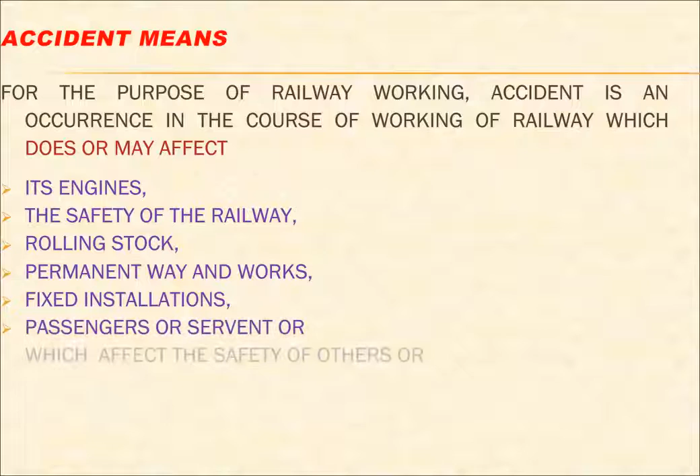Accident means, for the purpose of railway working, an occurrence in the course of working of railway which does or may affect its engines, the safety of the railway, rolling stock, permanent way and works, fixed installations, passengers or servants, or which affects the safety of others, or which does or may cause delay to trains or loss to railways.

For statistical purposes, accidents have been classified in categories A to R, excluding I and O.

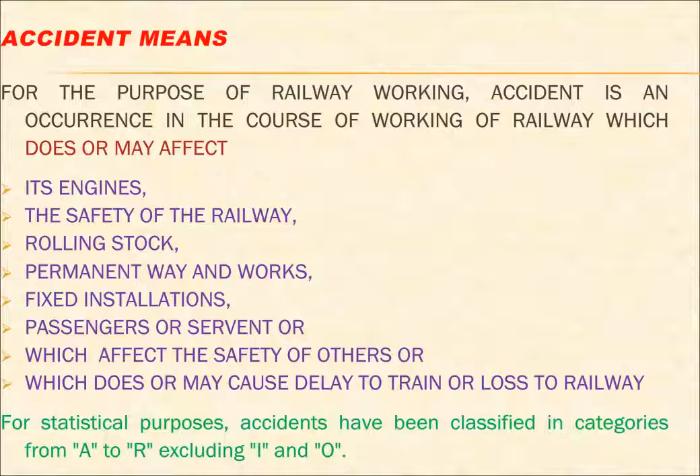Serious accident. Serious accident means an accident to a train carrying passengers which is attended with loss of life or with grievous hurt to a passenger or passengers in the train, or with damage to railway property the value of which exceeds 2 crores, and any other accident which, in the opinion of the Chief Commissioner of Railway Safety or Commissioner of Railway Safety, requires holding of an inquiry by the Commissioner of Railway Safety, shall be deemed to be a serious accident.

Classification of accidents: Number 1, train accidents. Number 2, yard accidents. Number 3, indicative accidents. Number 4, equipment failure. Number 5, unusual incidents.

Train accidents: consequential train accidents and other train accidents. Consequential train accidents include train accidents having serious repercussions in terms of loss of human life, human injury, loss to railway property, or interruption to rail traffic.

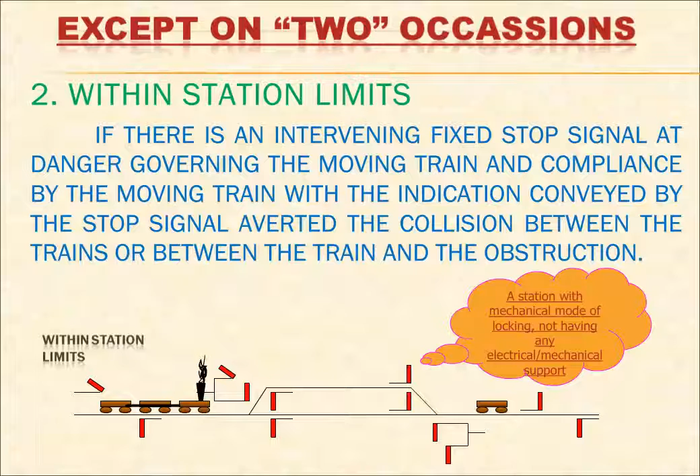Breach of block rules: train entering block section with improper authority to proceed or without authority to proceed. Train entering into a sand hump or into a catch siding or slip siding. Train dispatched on wrong line. Train received on wrong line. Train received onto an obstructed line, not constituting averted collision.

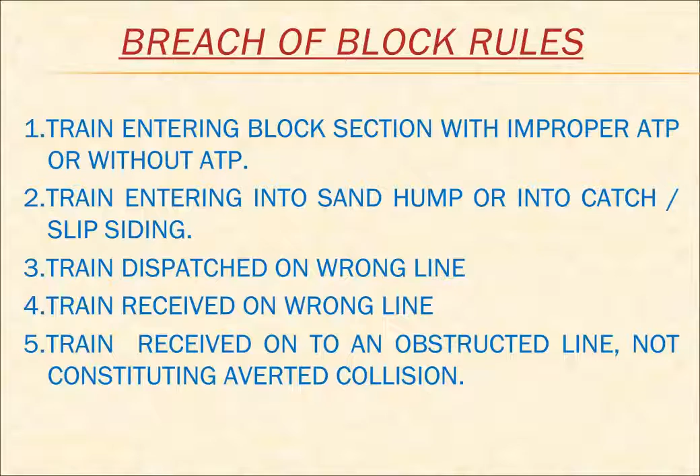Signal passing at danger, H. Train passes a fixed stop signal, including a banner flag or engineering stop indicator, other than IB, automatic or gate signal, at danger without any authority or with improper authority.

Fact brought to the notice of SM through a written memo by the guard of the train. SM, ASM or pointsman must confront the loco pilot and guard with regard to the position of the signal and the position of the lever or knob concerned.

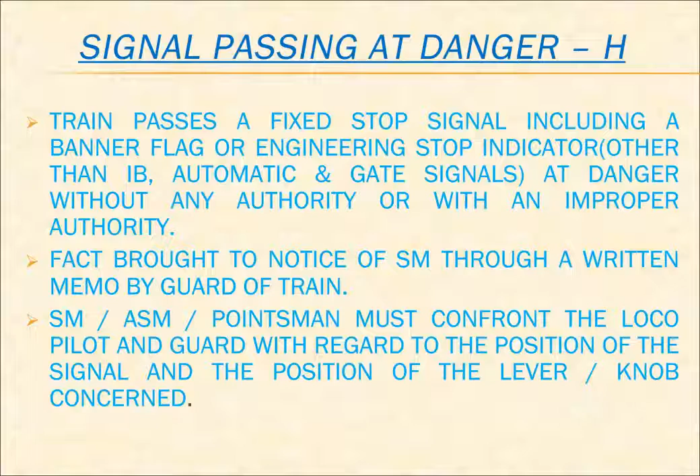The position of the signal and route should be recorded by the SM and signed by the SM, loco pilot, guard and other witnesses if available. The distance by which the train has passed the signal should be recorded by the length of the engine plus coach or wagon, and or a telegraph or OHE post, or by measuring the actual distance in meters.

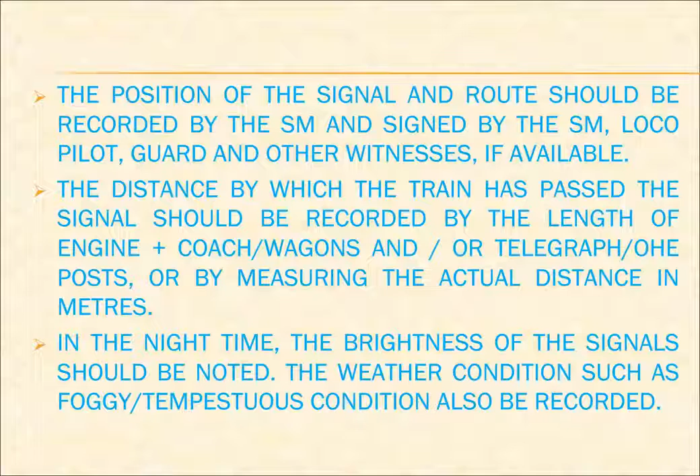At night, the brightness of the signal should be noted. Weather conditions such as foggy or tempestuous conditions should also be recorded. If the loco pilot is required to use glasses, it should be checked whether he was in possession of them and using them.

Arrangement for testing brake power of the train shall be made by officers or senior subordinates at the nearest C&W examination point. Breathalyzer test of the loco pilot and assistant loco pilot should be done immediately, and blood samples of LP and ALP should be collected.

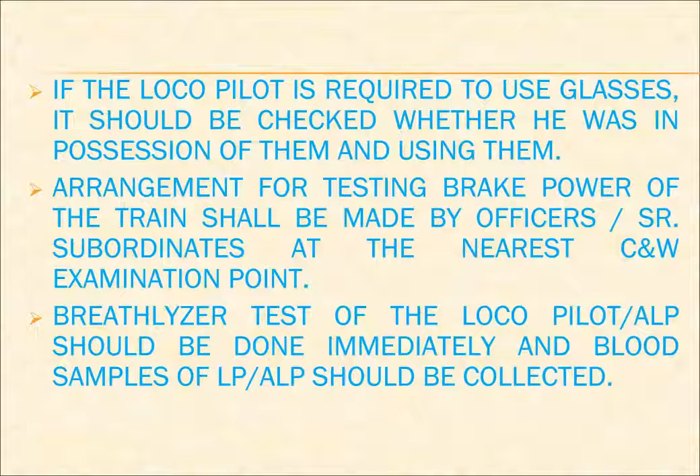Next, classifications: J, failure of engine and rolling stock. K, failure of permanent way. L, failure of electrical equipment. M, failure of signaling and telecommunications.

N, train wrecking, sabotage, bomb blast, explosion or hijacking. P, incident of persons falling out of train or run over. Q, other incidents, natural death or murder or suicide or robbery or blockade to train services. R, miscellaneous - vehicle running away, cattle run over, or floods, breaches or landslides.

ART - composition of ART. Crane, hydraulic re-railing equipment, MFD or LUKAS, engineering equipment van, mechanical equipment van, electrical equipment van, power and tool van, staff kitchen car and brake van.

General target time of ART: day 30 minutes, night 45 minutes.

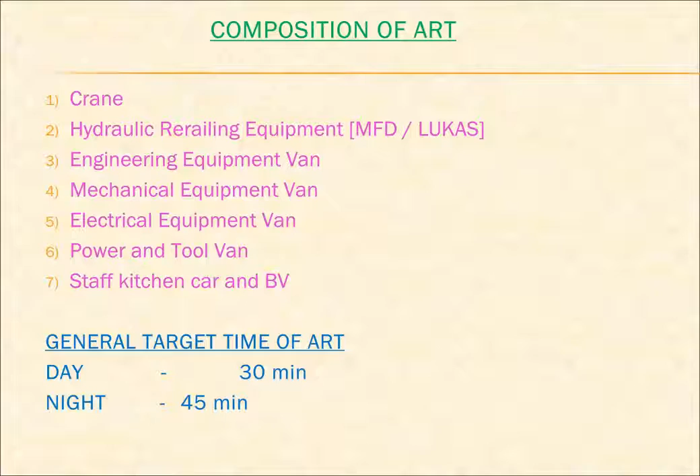MRT, composition of MRT, scale 1: medical van, auxiliary van, human rescue device, that is cold cutting machine.

General target time of MRT: direct dispatch 15 minutes, indirect dispatch 20 minutes.

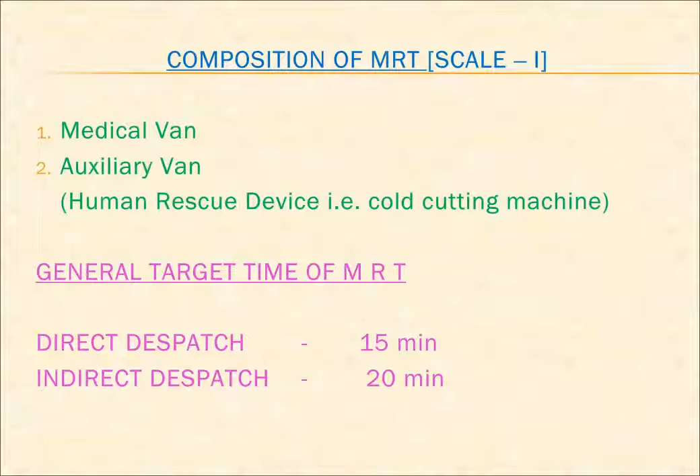Mock drill for ART. Mock drill to be conducted for ART once in 3 months.

Ex gratia for train or LC gate accidents: death 50,000 rupees, serious injury 25,000 rupees, and simple injury 5,000 rupees.

Compensation through RCT within 1 year of the incident: death 8 lakhs.

Accident sirens two long: accident at loco shed or in traffic yards adjoining loco sheds - 3 long. Outstation accident, main line clear, ART required - 3 long, 1 short.

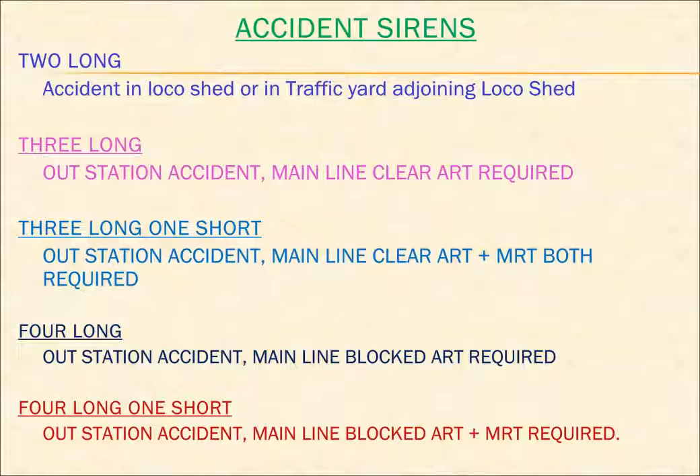Duration of accident siren: duration of long siren 30 seconds, duration of short siren 5 seconds. Gap between long and long or long and short is 5 seconds. Repetition after a gap of 30 seconds. At least 3 calls shall be given.

Next, disaster management.

Definition of disaster. The definition of railway disaster and coordination of DM plan was revised. Accordingly, the railway disaster is defined as: a serious train accident or an untoward event of grave nature, either on the railway premises or arising out of railway activity in that area, due to natural or man-made causes, that may lead to loss of many lives and/or grievous injuries to a large number of people and/or severe disruption of traffic, necessitating large scale help from other government or non-government and private organizations. Board has also approved the proposal to nominate either GMs, AGMs or CSOs for declaring an untoward incident as a railway disaster.

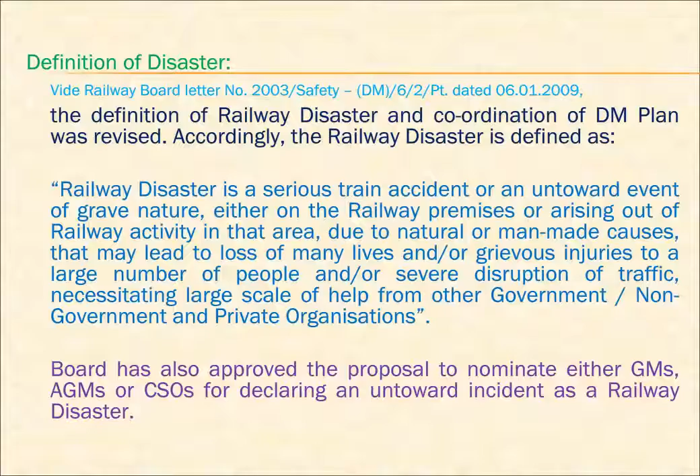Disaster Management Act 2005. Government of India enacted a law on disaster management to provide for the requisite institutional mechanism for drawing up and monitoring the implementation of the DM plan, ensuring measures by the various wings of the government for prevention and mitigating the effects of disasters, and for undertaking holistic, coordinated and prompt response to any disaster situation.

The DM Act was enacted in 2005. The Act provides for specific role for local bodies, including Panchayat Raj institutions as well as urban local bodies like municipalities, in disaster management. The Act shall facilitate effective steps for the mitigation of disasters, prepare for and coordinate effective response to disasters and other related matters.

National Disaster Management Authority, NDMA. The Government of India constituted NDMA with the Prime Minister as the chairperson at national level on May 30, 2005. It has been entrusted with the responsibility to lay down the policies, plans and guidelines for disaster management, and approve the National Disaster Management Plan and the plans prepared by the ministries or departments of Government of India.

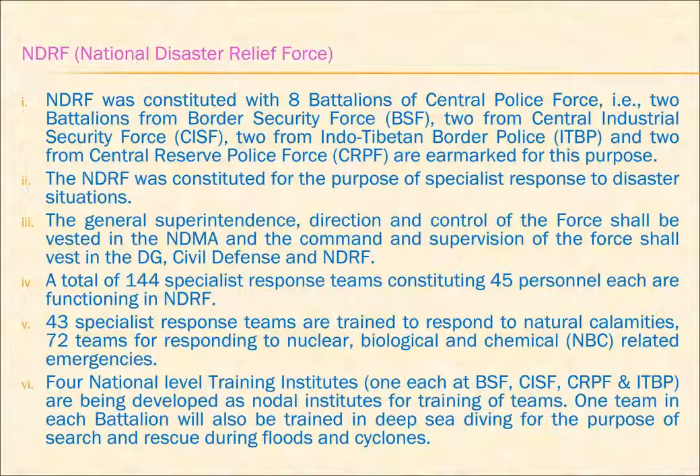The objectives of the disaster management plan is to achieve an instant disaster trigger mechanism, rapid access to reach the site of accident within the golden hour and render medical care, using a GIS data bank to ensure quicker means to render medical help, minimizing disaster effects.

Using the GIS data bank for quicker means to call for all the data, logistics and infrastructure to redress the human calamity, saving lives by quick extrication of victims and effective on-site medical management.

Stabilization of condition by quick resuscitation, expeditious extraction and shifting to rescue vehicles, care and concern for the affected customers, and speedy transportation to hospital.

Proper and timely dissemination of information to the public in the aftermath of the disaster, and defining responsibilities of various staff and departments.

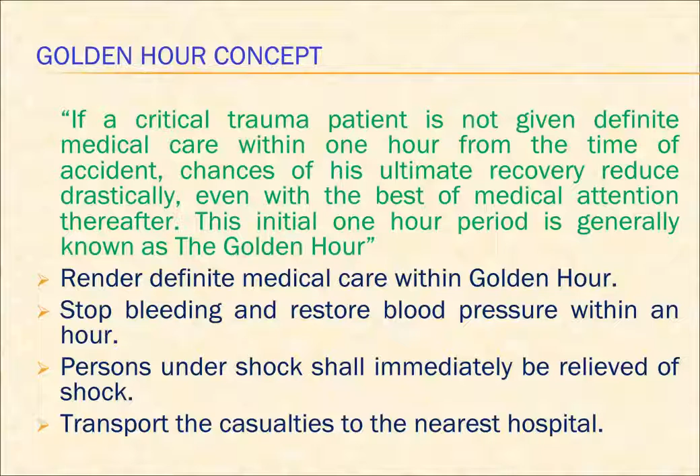Triage. The term triage originates from the French verb trier, which means to sort, select or classify. There are many definitions of triage.

In disaster medicine, triage is an evaluation or assessment process of the medical condition of victims and their categorization depending on the severity of sustained injuries.

Triage is to solve the problem of imbalance which has come up due to excessive demand on the available resources. The triage process ensures care to casualties according to the severity of injury, need for treatment, prognosis, and available medical resources.

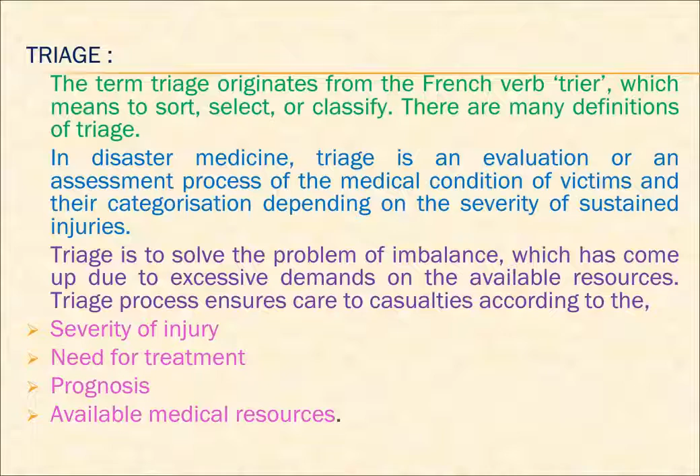Disaster response, instant action team: loco pilot and assistant loco pilot. Their duties:

Ensure loco flasher light is switched on, note down the time, location and weather condition, ensure the formation is secured, protect the train, giving priority for protection on the adjacent line, on double line and multiple line sections.

Inform the guard, nearest SM and section controller or TPC by using walkie-talkie set or CEG or emergency telephone socket, etc. In other words, make efforts for the quickest possible means of communication for transmitting the information.

Render first aid and assist the guard in saving lives. Ensure the speedometer memory freeze button is operated, duly breaking the glass cover.

Ensure the important documents such as BPC, VG, caution order and other train passing documents given en route by the station operating staff are handed over to the inspector or officer who arrives first at the accident site.